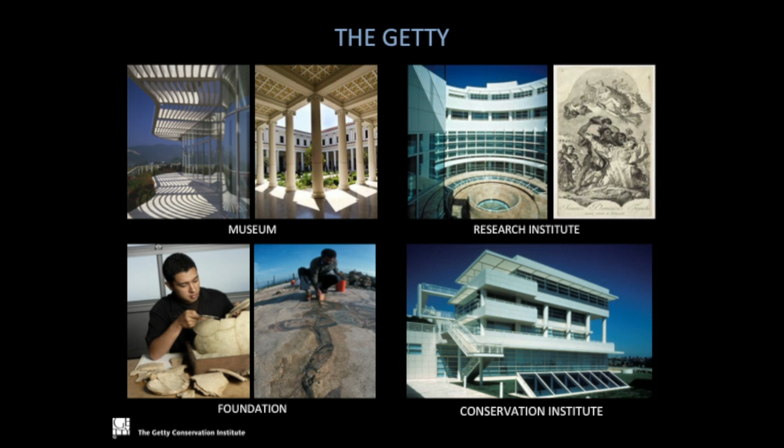So first I'm going to talk a little bit about the Getty. The Getty has four institutions. One is the museum, which has two locations, one in Los Angeles above Brentwood, and the other is the Getty Villa in Malibu. There is also the Getty Research Institute, an institution dedicated to the history of the visual arts in general, the Foundation, which gives financial support for special projects all around the world, and the Getty Conservation Institute, which is where I work.

The Getty Conservation Institute, or the GCI, has three departments: the education department, the science department, and the field projects department. Sometimes these three departments work together, and sometimes we do have projects that we run independently. So there is a lot of collaboration between all of them.

The field projects department, where I work, has a series of projects. We have a total of 22 projects that are around 25 countries around the world.

We just started our Conserving Modern Architecture Initiative. We have organized a colloquium to identify what the needs are in the field. We also started working on the Salk Institute, a masterpiece of Louis Kahn.

We have been working at the Eames House, a modern house located in LA, and we organized a colloquium to try to identify and design guidelines for architects to design within the historic environment, a topic of great importance.

We have a small section on recording and documentation, where we have developed inventories. The latest is Arches, an open source inventory system that allows many institutions to survey and document their sites.

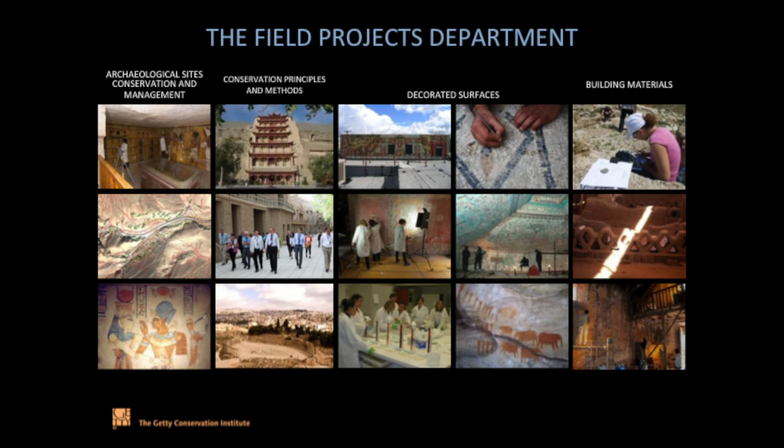And then within building materials there is the Earthen Architecture Initiative. That's the project I am going to talk about now, and within that I'm going to show two examples of projects.

So the first question is: why is earthen architecture so important? Basically, soil has been a primary material since man learned how to build houses and cities, almost 10,000 years ago. So it was the material of choice.

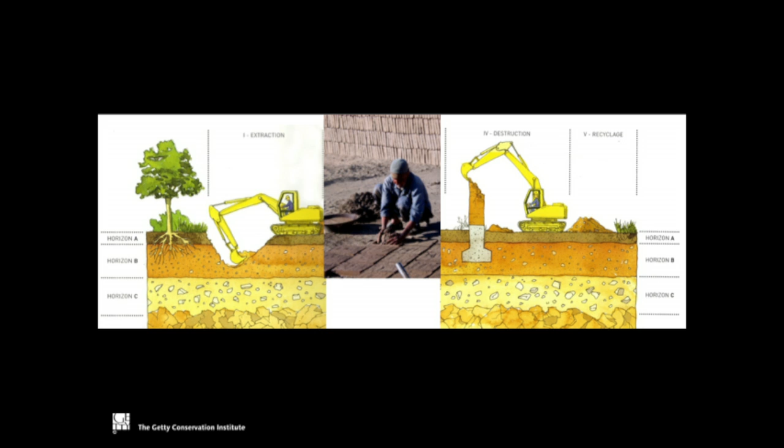This had to do with the fact that it's easily accessible, but at the same time there's a lot of attention to earthen architecture now because it's extremely sustainable. As you can see in this diagram, you take earth from the earth, you build, and at some point the earth goes back to the earth. It was used all over the world from the early ages.

This is Cliff Palace in the Mesa Verde National Park in Colorado in the United States. This site has earthen plasters that were done with a specific type of soil, from the 13th century.

Then we have, for example, another site, Huaca de la Luna in Peru, which has not only decorated surfaces made of earth, but also pyramids made of adobe, belonging to the Moche culture in Peru. This was built between the 1st and 8th century.

We also had the Citadel of Bam in Iran, which unfortunately got damaged by an earthquake in 2003. This is one of the largest citadels made of earth, and it was built in the 7th century.

We also have the archaeological complex of Chan Chan in the north of Peru. This was built by the Chimu culture after the Moche culture, in the 9th century.

It has an area of 20 square kilometers, with 9 palaces, the main one being the Tschudi Palace. We also have the Mosque of Jenne, built between the 14th and 15th century.

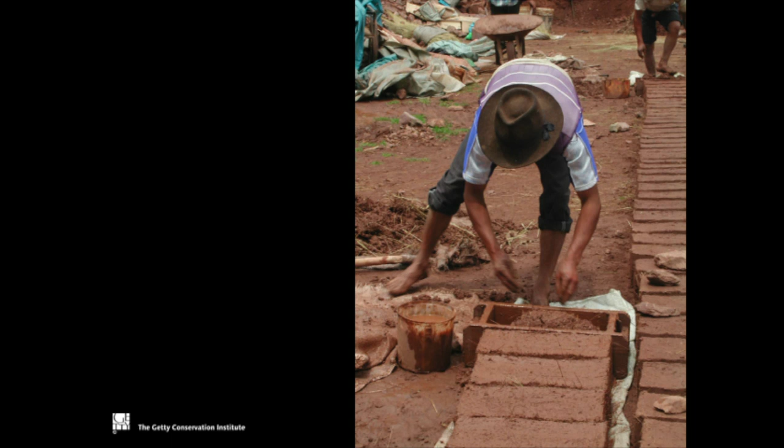Actually, 30% of the population live in earthen buildings. But that presents a series of challenges, particularly on historic sites, where there has been a lot of deterioration and lack of care. That's the reason why 57%, more than half, of the World Heritage sites in danger are made of earth, and 16 of 100 sites on the World Monument Fund watch list are made of earth. So there is definitely this problem of earthen materials and earthen architecture being deteriorated.

So the question is, why? As I said before, there is this lack of connection between the earthen building and the community, but there is also a lack of understanding of the science behind earthen architecture.

The first thing everybody needs to understand is that earthen architecture is made of basic soil. A soil consists of an ensemble of discrete particles of various shapes and sizes. I'm sure you as engineers know this. The types, the relative proportion of these particles, and most importantly, the forces between them give a soil a particular character and behavior.

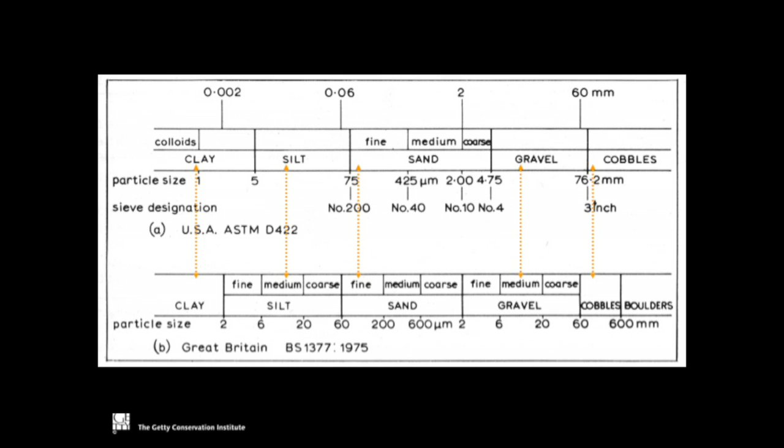This is a very basic chart that shows all the particles that are part of any kind of soil: clay, silt, sand, gravel, cobbles. The difference between the two charts is that one is the US ASTM standard and the other is from Great Britain, so sometimes there's some confusion depending on which part of the world you're in.

But the issue is how these particles interact with each other, and what are the main components that make a soil useful for one type of construction or another. These schemes are from CRAterre, an institution at the University of Grenoble in France that has studied earth as a building tradition for many, many years, and they came up with these graphics to make it easy to understand.

The first one is like a soil nodule — you see there is some clay, some sand, and in some cases some gravel. If you look inside, you can see different crystals. Looking further inside, it's a clay crystal with some ions around it. Going deeper, you see different crystalline units or sheets, with some space between those sheets. If you look at each of the sheets, there are two layers with ions between them — this is actually where water stays when you pour water into a clay material.

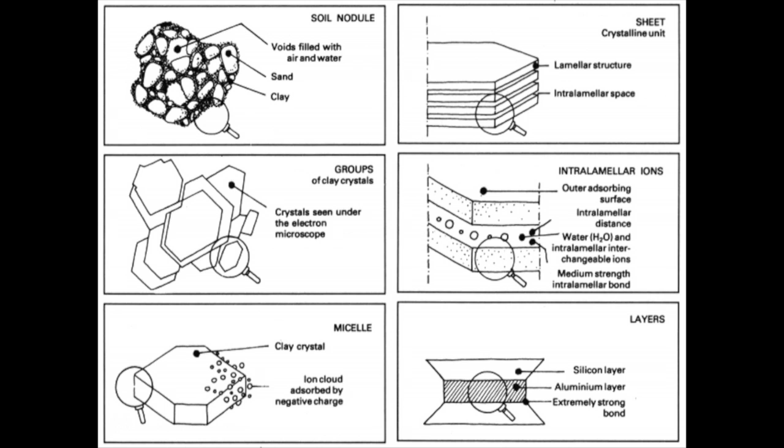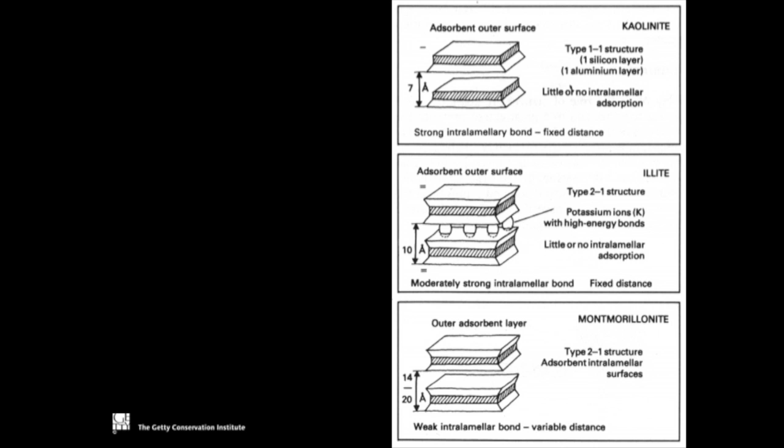These clay crystals can be of three types — I'm sure you've heard about this. We have kaolinite clay, which is very stable and mostly used for construction, because the distance between the two layers is constant. Then there's montmorillonite, which is the opposite — extremely unstable, because its distance between layers varies, meaning water can come in and expand the clay. And we have illite, which is stable in distance but has a lot of potassium ions. Those are the main three groups of clay minerals we can find, and that's a very important component of any kind of soil.

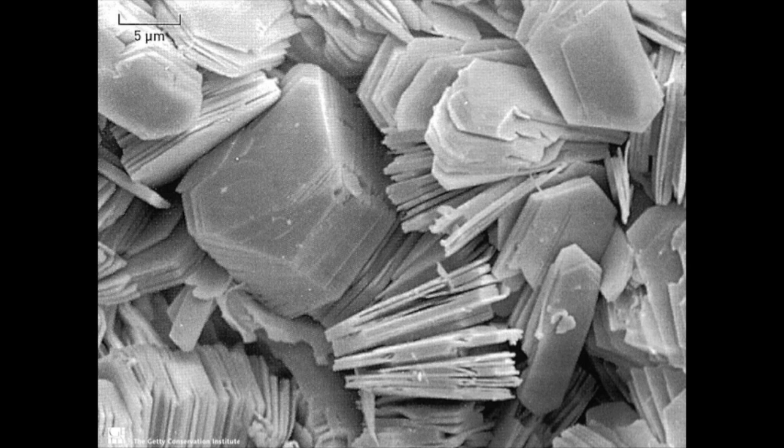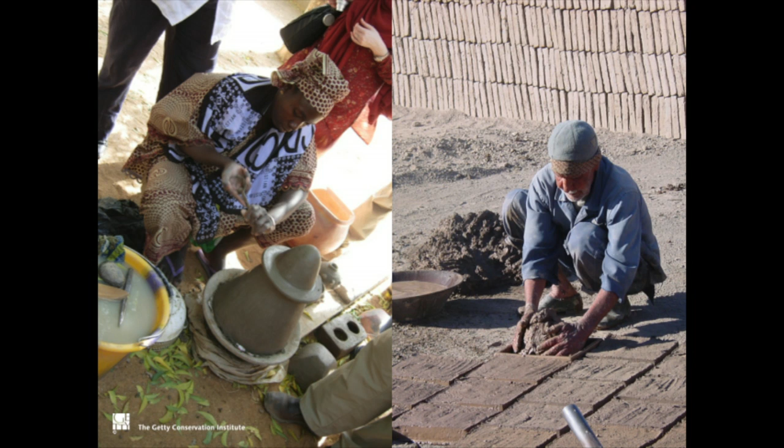This is the other very important component of a soil for construction: the amount of water you put on. You're probably aware of the forces that apply when two elements are joined by water, and that's exactly what happens in a soil for construction. You've probably seen the famous movie The Ghost, with the clay scene. Basically what you have there is a very stable clay that has had a lot of water put on it, so there's a lot of clay dispersion, allowing you to shape the vase of whatever you're doing. So it's much more plastic.

When you start using the same soil for construction, you have to manage the amount of water with the clay, but also the amount of sand and gravel. So water, despite the fact that for earthen buildings people think it's a really bad thing to build with, is actually one of the most important elements.

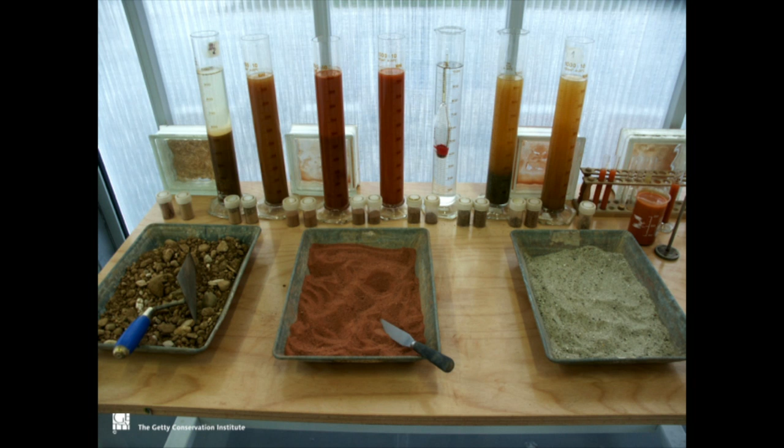Basically, the difference between one and the other is that you have all the crystals dispersed, and you have a different force here than here. This allows you to move it. This doesn't allow you to move it, because it's more strong. And there are a lot of tests that allow you to understand what type of soil you're dealing with in construction.

So we have a lot of tests for soil characterization: granulometry, sedimentation, X-ray diffraction, scanning electron microscope, which is what the images you saw before were from, ion chromatography, and then you have the Atterberg limit test.

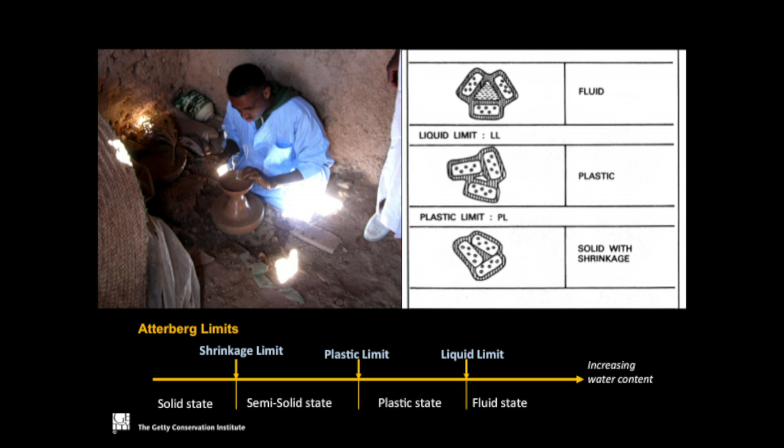That's a test very easy to do in a laboratory that basically allows you to understand when a soil goes from the solid state to the semi-solid state, the plastic, and then the fluid state. You also have water absorption by total immersion and capillary action, and all of these tests allow you to characterize a soil.

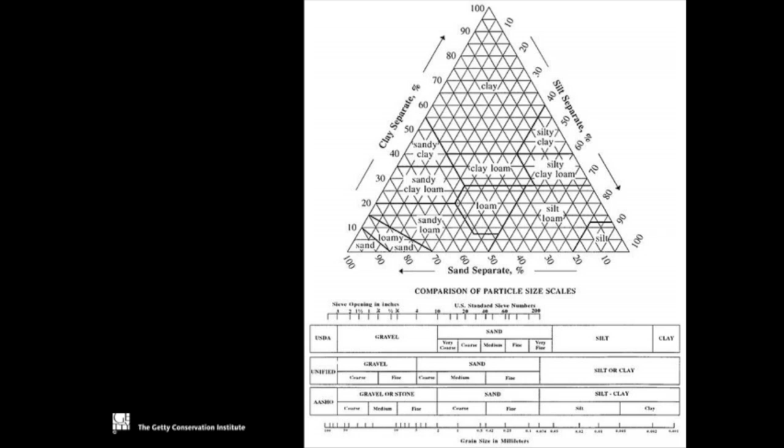This is a chart used by the USDA, the United States Department of Agriculture, that classifies all soils in this triangle, and it allows you to see how much sand you have, how much clay you have, etc. But that type of classification doesn't really help you understand which soils are good for which construction techniques.

So again, CRATerre, this institution in France, developed this chart where you have the proportion or amount of different particles on one side, and the state of hydration on the other. If you mix the two, you can start finding soils suitable for certain construction techniques.

For example, if you have a soil that is sandy, has a little bit of silt and a little bit of clay, and has gravel, and is in a sort of humid but somewhat dry state, you can use that soil

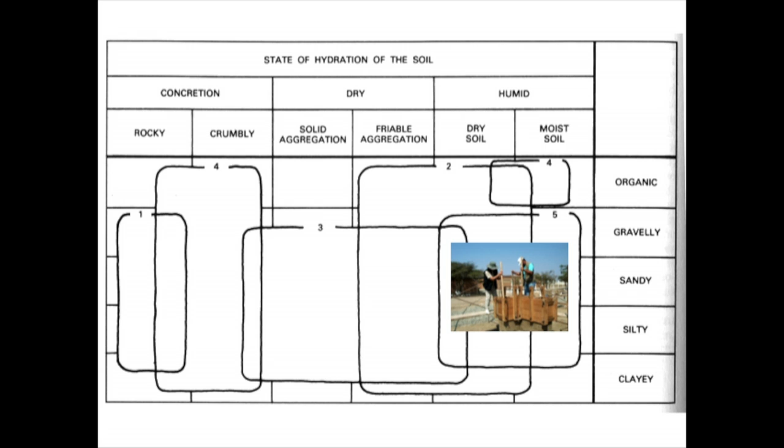for rammed earth construction. On the other hand, if you have a soil that has mostly silt and a lot of clay, with a little bit of gravel and sand, and is in a semi-soft state, that's a good soil for adobe. You also have a very similar configuration, but more clayey, for quincha, which is the technique

where you need to put the mud inside. All of these soil types have different characteristics. So not every soil is good for building construction. It's not that we can just go out, take the soil that's there, throw some water on it, and then use it. There's a special configuration of particles that allows you to build in one way or another.

There are at least, I think, 12 recognized construction techniques for earthen materials that use these different types of soils. The first one is the dugout, which is just carving within the earth, and this is an image of Cappadocia in Turkey.

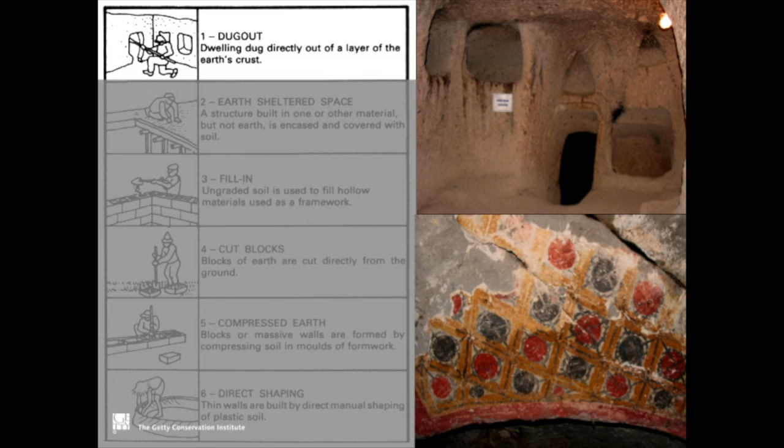I think it's in Central America. In English, I think it's called wattle and daub. There are constructions also in England made of this technique.

But the question is, if we have all this science behind how soils behave and how they're used for earthen construction, why does it fail? There are multiple reasons why it fails, but the Getty is concentrating on two, which had to do with the projects we are developing.

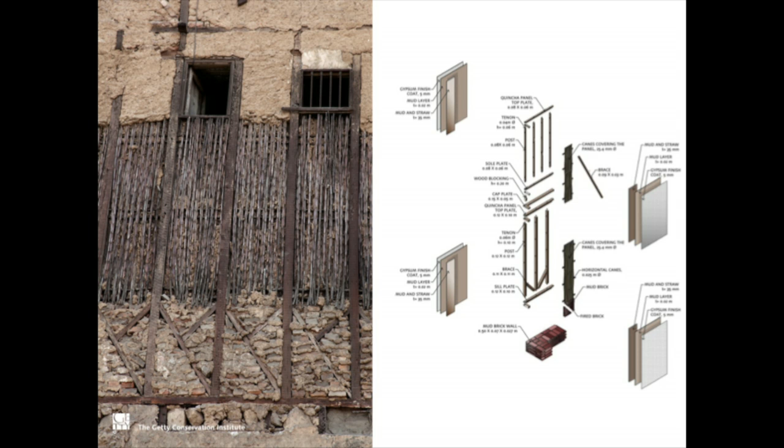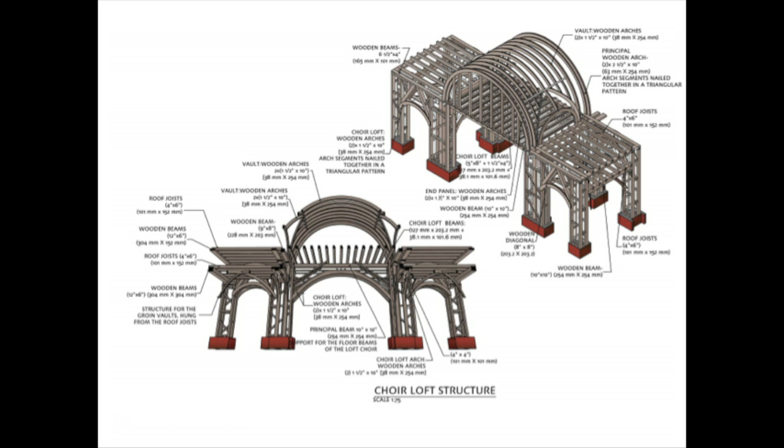So these churches are made of earth. But since then, we have suffered a lot of earthquakes, and in some cases that turned us into building with concrete or brick or reinforced masonry, and the tradition of building on earth was moved to the rural areas, because it's still being used in Peru.

But that was for new construction, not for historic buildings. So when we were deciding where we were going to work, there was an earthquake in Peru in 2007, in the south part of Lima, and there were a lot of sites that were damaged, not only made of earth, but also, you can see here, this is concrete, probably badly constructed, and that's probably the reason why it fell.

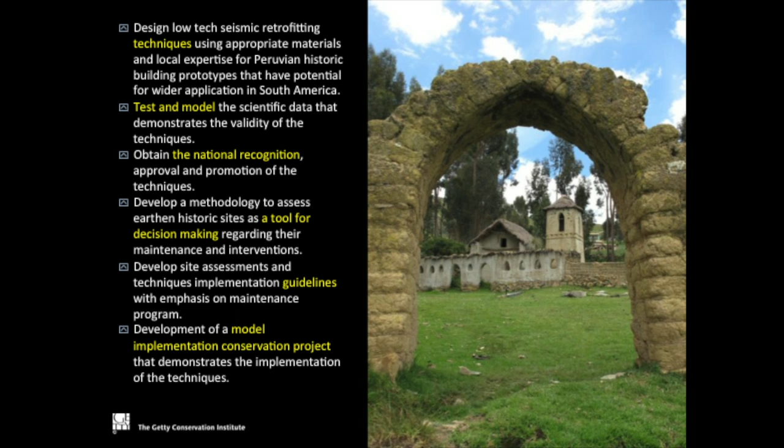And that has a whole methodology that was also developed with our partners. At the beginning, we partnered with a School of Engineering in Peru, the Pontificia Universidad Católica del Perú, that has more than 20 years working on earth, mostly for new construction. Then we partnered with University College London because they had expertise in developing computer or finite element analysis or modeling. And then we also partnered with Carleton University for a specific component in one of the buildings.

We always partner with the state agency, in Peru's case, the Ministry of Culture. But then we also created this peer review group that is basically a series of engineers from different parts of the world and also engineers in Peru who meet with us at specific points of the project to let us know if we are doing something wrong.

So we basically presented the project to them and they gave us their feedback. That was also a way of disseminating the project.

The project has a methodology: first we did research, then analysis, testing, and design. Then comes the phase of dissemination, and at the end we develop implementation projects as model conservation projects.

So we started by trying to identify building prototypes in Peru that were similar to other buildings in Latin America. We visited a series of sites, ranked them by a series of conditions, and at the end we selected 4 buildings.

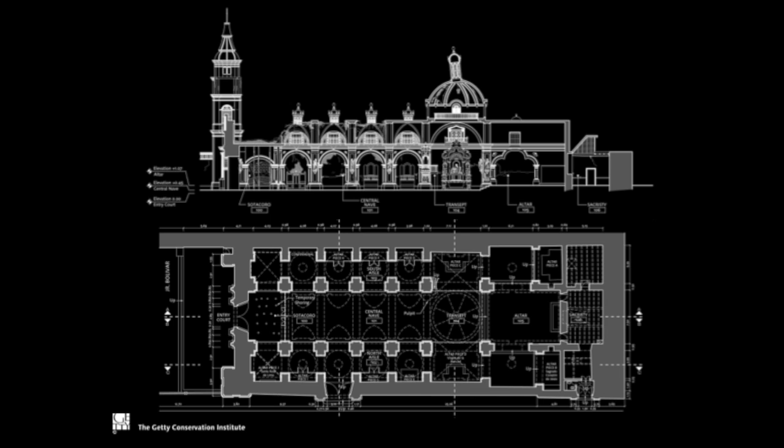The first one is the Cathedral of Ica. We did the architectural survey, not with Mario but with local professionals, and did a site assessment after the earthquake. We also used some non-destructive techniques.

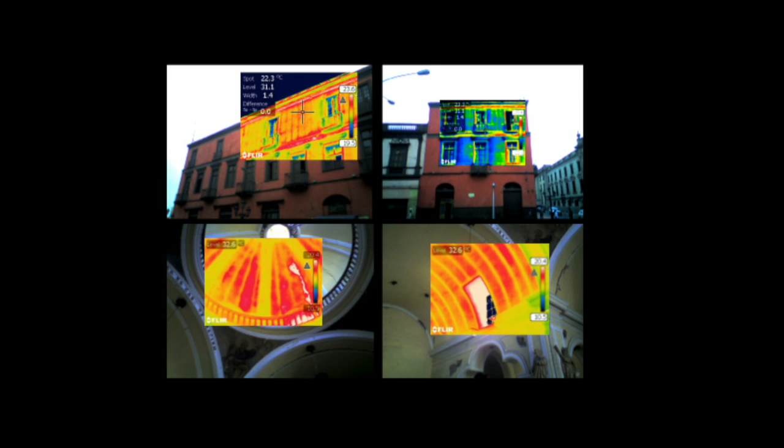So what we did is use the thermocamera to identify them. Here you can see the wooden posts behind the plaster. We used the same method to identify the wooden arches at the Ica Cathedral, which you can see there.

After doing non-destructive survey as much as we could, the engineers really needed to know exactly how the connections between the different structural elements were - something architects don't like to do because it's like you're damaging the building, but the engineers insist.

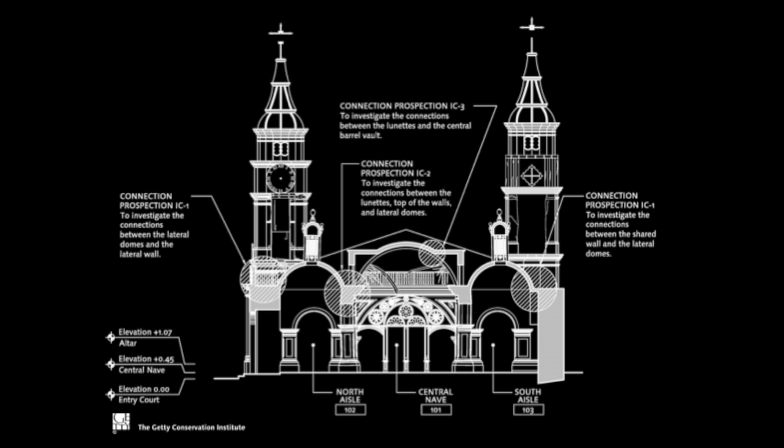So I had to go through all the permits with the Ministry of Culture to be able to open up the building in a very methodical way. We looked at columns inside, at corners, and went to places you could not possibly imagine. At the end, we had the general configuration of the site, all documented and measured.

This is the other site where we've been working with Carleton: Cuñotambo, a small village of around 500 houses, 2 hours south of Cusco. The beauty of the city is that it's all made of earth - very authentic, no building in concrete. That's really good for us.

And it has this beautiful church - one of the most important things is that this church has never been modified, so however the Spaniards built it, that's how it is. We chose this particular church because it has not been modified, and it was very typical of the churches in the Andes.

One of the challenges is that it has these beautiful wall paintings. Most engineers will agree that when you have to retrofit a building, it's very difficult to do without touching the walls. That was a challenge we wanted to address: what do you do when you have wall paintings and you cannot remove them?

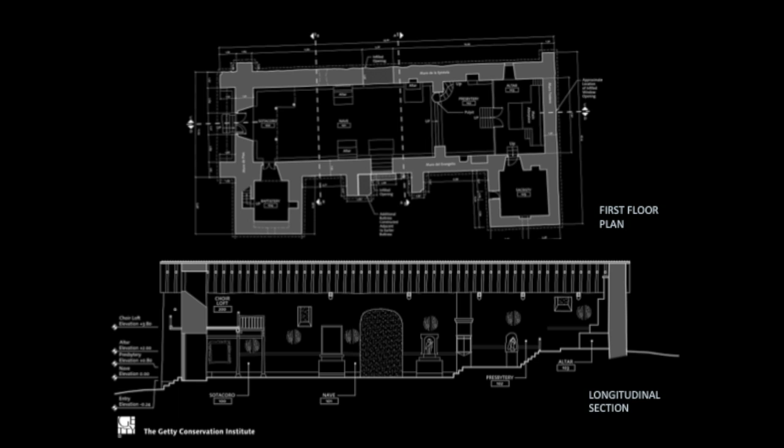So we did the same architectural survey, again not with Mario but with local professionals. We did the openings and came up with the general structure of the building. These 4 buildings were later recorded in publications - I brought some here, and I also gave some to Mario to distribute accordingly.

So we have what we call a construction assessment that basically describes how these 4 buildings were put together. And then we had our first meeting with our peer review committee.

They were all wearing Peruvian shirts because at that time the Peruvians were playing, I don't know, the Latin American Cup or something, and they were almost winning, which never happens in Peru. So everybody was really excited about it. So I bought them T-shirts, and they wore them with the Getty banner.

And then we visited the sites, but we also had a series of meetings where they evaluated the methodology we applied for the construction assessment, but also for the testing and the modeling. So once the peer reviewers approved the procedures for the modeling and testing, we started the testing and the modeling.

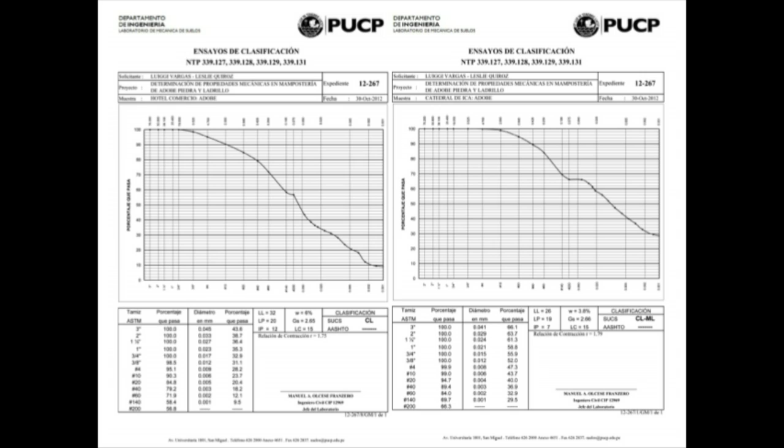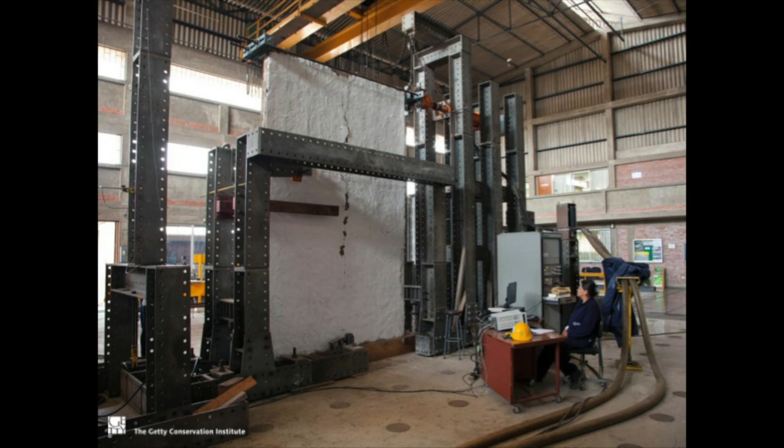We did granulometry for all 4 sites. We also did a lot of wood identification and wood testing for 2 of the 4 sites that have wood. We also developed this displacement testing at Católica University.

We reproduced the quincha panels of El Comercio, but we also got lucky enough to get — it's not luck, but one of the houses in the historic center had collapsed and they were going to demolish it, and they had these historic quincha panels. So we said, no, don't break them, don't break them.

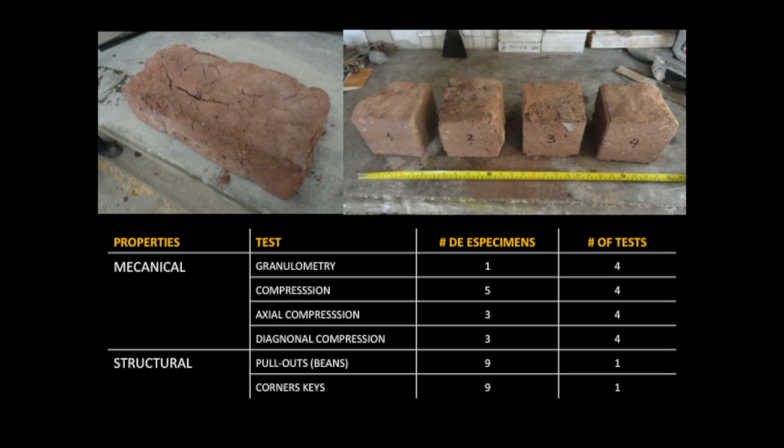So we took the quincha panels to Católica and tested them. We also tested historical materials, and did the typical mechanical tests for mechanical and structural properties for all 4 sites. There were around 300 tests run over a period of 1.5 years at Católica University.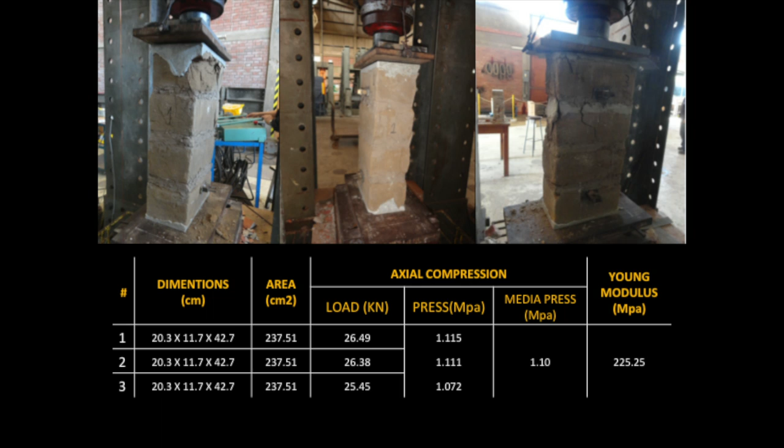We did compression tests, actual compression tests on piles. For these we reproduced adobes, but we also used historic adobes. We were able to get some adobes from houses in Lima and from the Ica Cathedral, so we were able to test historic material with diagonal compression.

And then Católica University developed this test called the pull-out test that allows you to understand how much a wooden beam can resist in an adobe wall. This is something that has never been done in Peru.

And that has to do with the fact that Peruvians, and a lot of people who work in conservation of earthen sites, always think these sites are just amazing because they've withstood so many earthquakes. But when the engineers ask us for calculations or numbers, we don't have any. The only thing we have is proof that the building is still standing after 300 years.

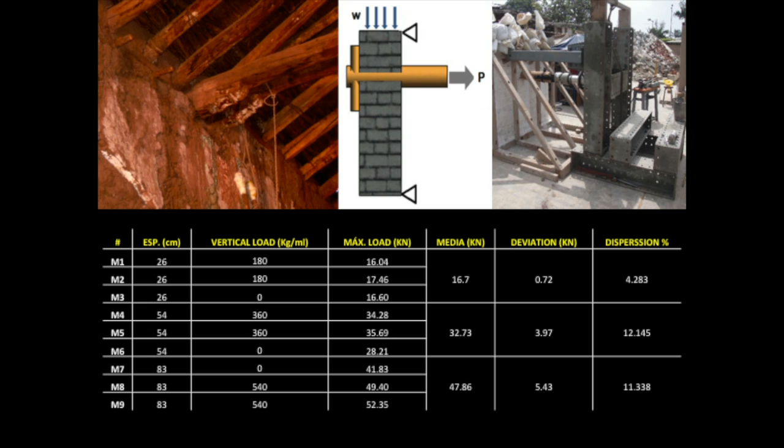But nobody has taken the time to actually reproduce and run the tests to get some numbers so the engineers are satisfied. So we've been able to do that. And these are more results of the pull-out test.

And at the same time, with the data from the construction assessment report, UCL built this model — probably you're familiar with this tool. We used Algor, a software that's normally developed for concrete and steel buildings, but we were able to modify certain parameters and characteristics to input some details of the materials.

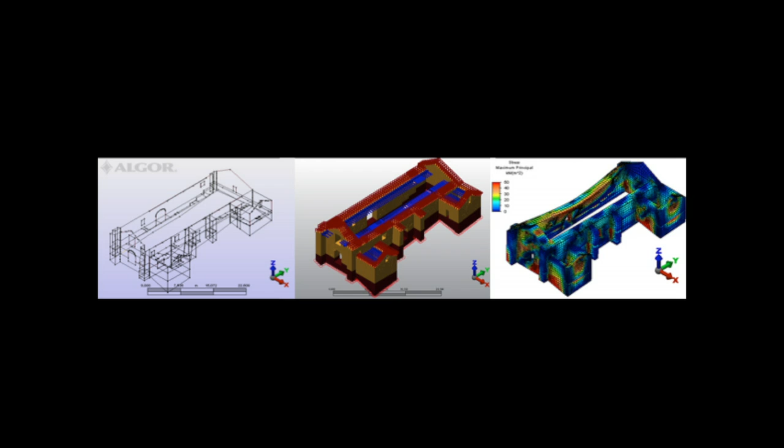So all the data collected from the tests was then transferred to the models. And you've seen these engineers — basically, with the reproduction of the models, you can see how a building behaves during an earthquake, and you can also understand what areas need retrofitting. So this is sort of a tool of analysis.

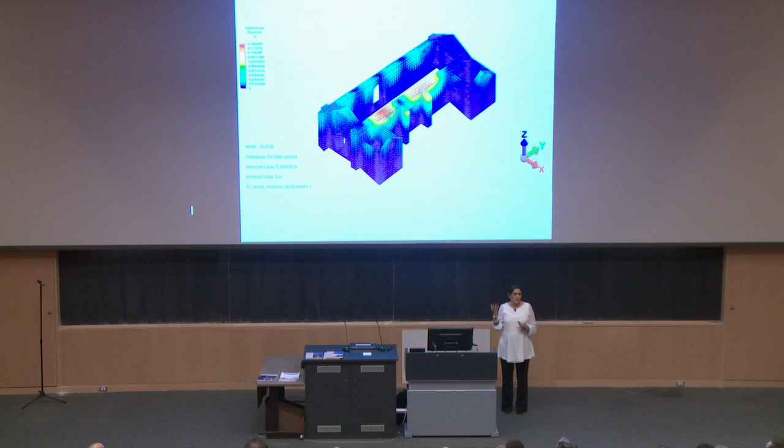And the reason, or the way we did this, is so that anybody in Peru can reproduce it if they want to do some intervention on their buildings. Then we did the same for Ica Cathedral. This isn't the latest version, but you can see how the wooden structure moves in certain directions.

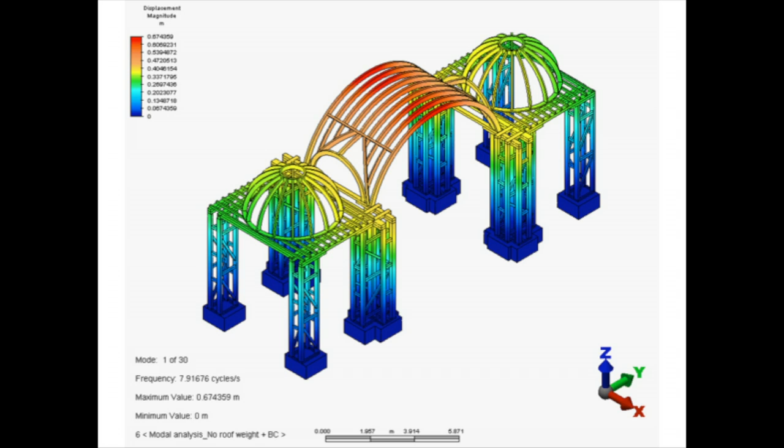This was really difficult to construct because we actually had to reproduce and run a bunch of tests regarding the connections of the wood. So we had to reproduce them, design the test, come up with the results, and send them to UCL.

And after that, we started to come up with some retrofitting solutions, in this case for the Church of Cuñotambo — very low tech, because Cuñotambo is about 4,000 meters above sea level. It's really high, and there's no way any engineer is going to stay there for the duration of the work. So we had to find materials that are locally available, so they can actually retrofit their church.

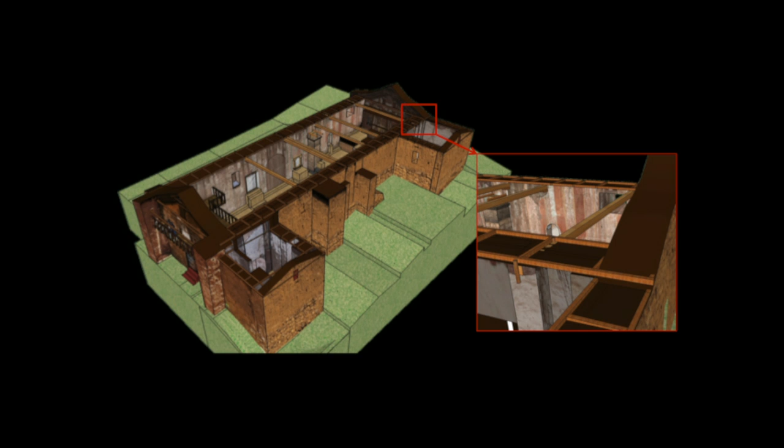At the end, we will run the model, and this is a partial one. It's very small, so I can do it. But we will run the model with these techniques already implemented, so they will have a scientific proof that the techniques work.

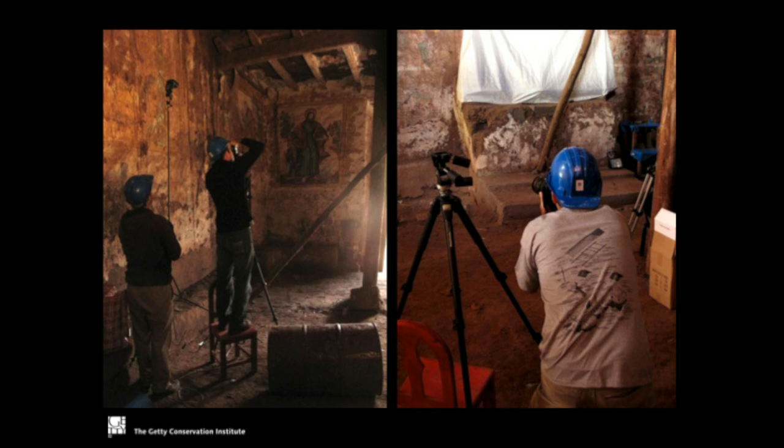In the process of doing this, we became really engaged with our Peruvian colleagues from the Ministry of Culture, and at that time we also started partnering with Carleton University. The reason we did that is because this site has these precious wall paintings, and we really wanted to be able to record them before any kind of intervention started. So we talked to Mario, who talked to Carleton University, and they were able to put together a program for them to develop the rectified photography of all the wall paintings.

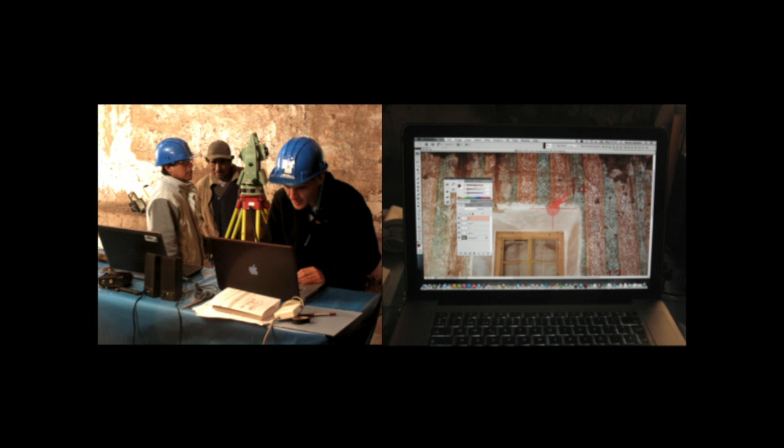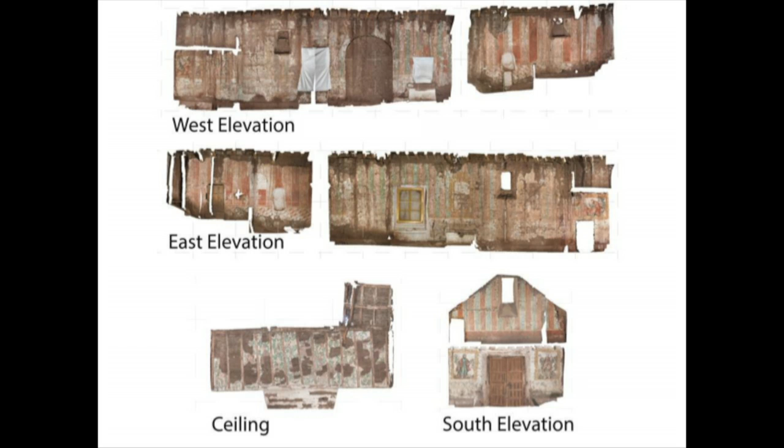I'm sure this is a familiar image for some of the engineers. One of the things that was also really good is that Mario had the capacity, because he speaks Spanish, to actually engage even more our Peruvian partners, so they were actually working with us during the process. It was a capacity building component as well in that project. This is the result of that rectified photography of the wall paintings.

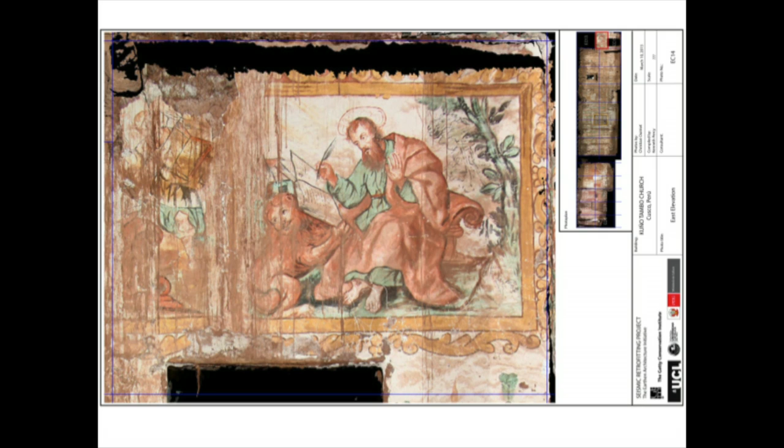After that, we did an assessment, in which students from Carleton also participated, of the wall paintings. We identified a series of conditions. This glossary was actually also made by Carleton students. Then we carry on the assessment using a system that is quite standard: you have the rectified photography, you put it in a sheet, you record the conditions, and with that you can make a proper diagnosis.

The reason why we were so interested in doing this and engaging our Peruvian partners is because in Peru, unfortunately, there is still this tradition, particularly in Cusco, that when you have wall paintings, what they do is basically a strappo. That means they cut the wall paintings, take them out, repair the wall, and then put it back. That's an old technique for the conservation of wall paintings. The problem is that afterward you can see the scars of the cuts, and that doesn't go away. So we are trying to work with our Peruvian colleagues to come up with a system where you don't have to do that in order to structurally repair the wall.

The next steps for this project: we are in the process of developing the construction documents for the seismic rehabilitation, so it's a project. Regarding the testing, we're going to produce another publication like this one, which hopefully will be done soon. It's a little bit challenging to write with the engineers, but we're getting there.

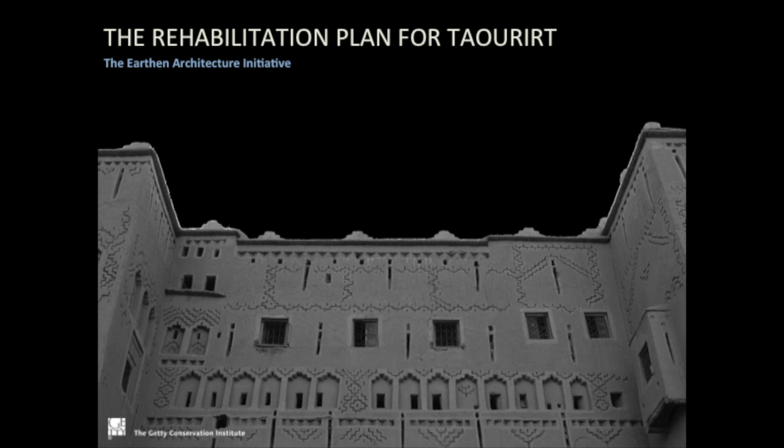So the second component I want to talk to you about is the Morocco project, which I think you have seen some images of already. This project started in 2010. The Getty decided to also investigate this region, where we had been working in areas of seismic design and building codes, etc. But we were aware that there was a huge amount of earthen sites, particularly south of Marrakesh, so we made a reconnaissance trip.

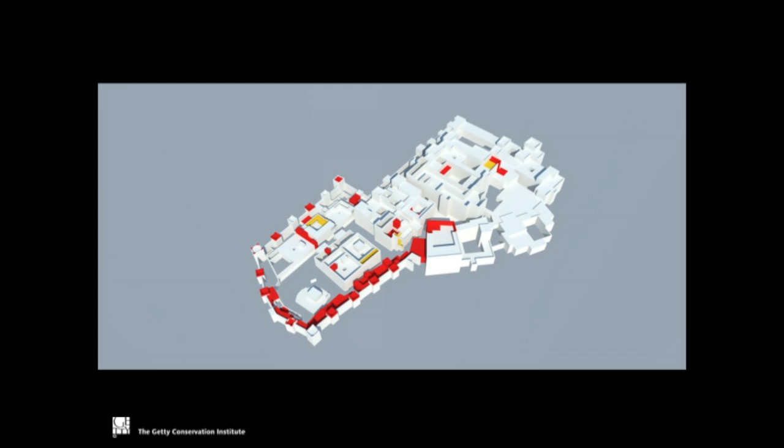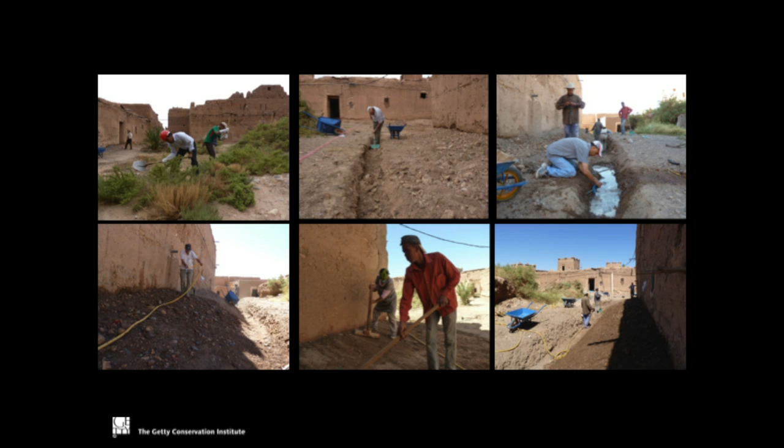But we got it. The other thing we did is develop emergency interventions at the site. For that we worked with an institution, CRAterre, in France, and we were able to work with CERKAS personnel to do stabilization of the walls. We were also concerned about the rainy season and how to deviate the rain for proper drainage, so we worked with our colleagues from Morocco at the Center for the Conservation of the Kasbah, which actually has its offices within the site.

It's quite impressive because there are only 4 people, and they are in charge of 250,000 Kasbahs in the region, plus other architectural heritage. I don't know how they do it, but it's a lot of work. We work with them whenever we go there. These are other images of the emergency interventions.

One of the main problems we encountered is that they don't have a systematic way of documenting their sites. Sometimes it's hand-drawn plans, other times photos. They learned how to use a total station—actually, I think it was a theodolite many years ago.

We wanted to give them a proper way to document, organize, and make an inventory of their sites. So that's when we called Mario again, and he went with his student to do the survey of the Taourirt area, the area I showed you. It was a really productive time—I think we worked over 3 weeks together.

At the same time, Mario was in charge of training our CERKAS colleagues. Now they are able to do their own survey. They have a total station they can use, and they continue receiving training every time Carleton goes to the site.

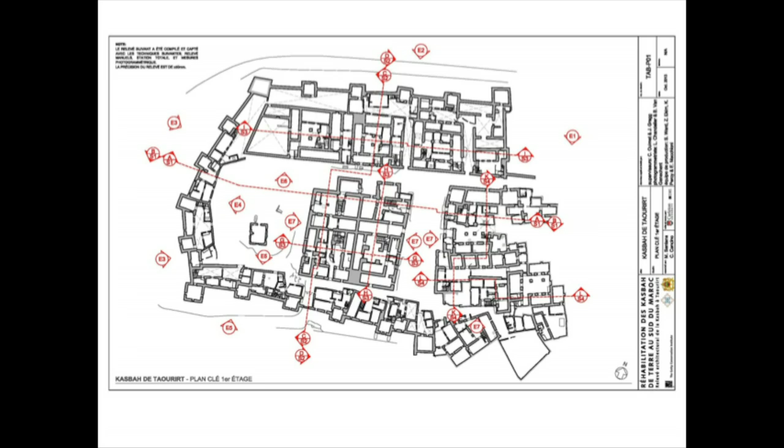We also had typical teaching sessions in the classroom where CERKAS personnel worked on rectified photography. They were able to do the survey with them and work on the process on site. They developed a series of comprehensive drawings and also rectified photography—I didn't include all the 3D modelings they developed to create accurate plans, because the photos really didn't show how it is. Some spaces are literally like this.

You don't understand what the previous owners were doing in spaces like that. But the Carleton students were champions—I don't know how they did it, but they carried the total station there and made the survey. When they couldn't use the total station, they did rectified photography, and with the software they were able to create plans and elevations.

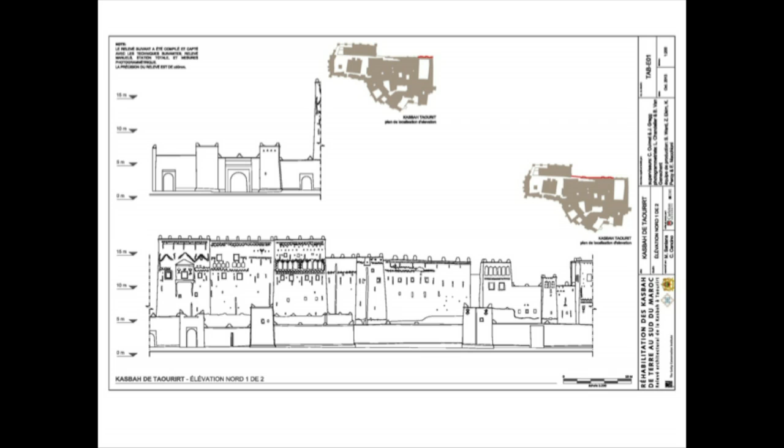This was also done with some consultants from Carleton, like Chris, whom we met, who works in Morocco with us as well. These allow us to have detailed elevations and cross sections, which is really good because they are geo-referenced, etc.

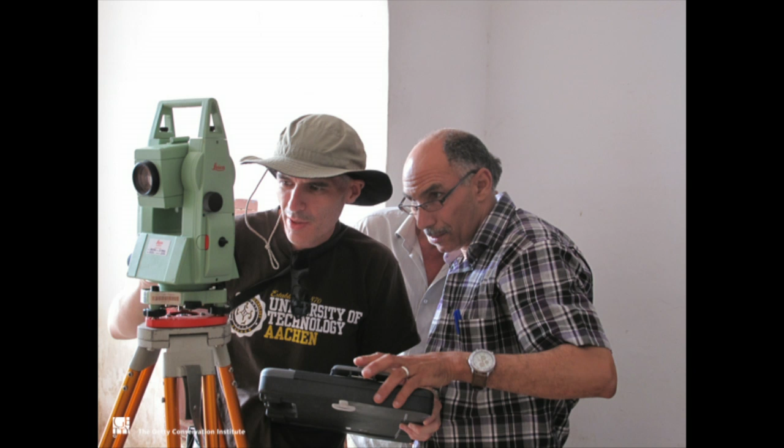I think you've seen this picture already in the series of images Mario showed you, because after the success of the first survey we wanted to continue developing the survey and training the CERKAS personnel, so we called Carleton again, this time to do the survey of the Caid residence. The training continued with the CERKAS personnel and also rectified photography in these really complicated rooms that Carleton students were able to get into.

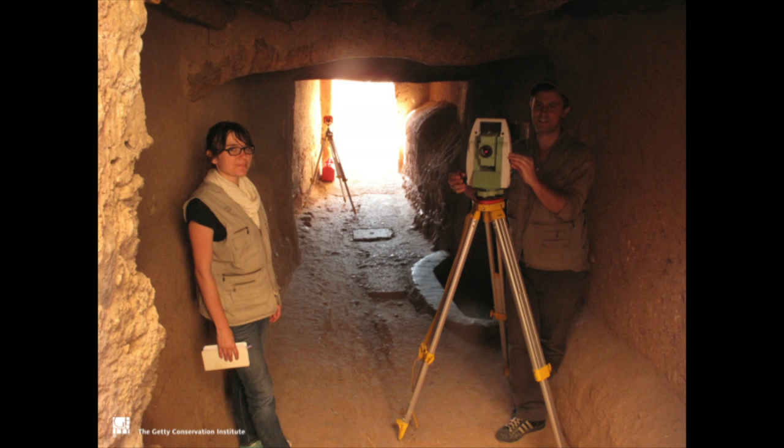At that time also, Carleton carried on the survey of the open spaces of the Qasr. That was a challenge because people were coming in with the total station, and the kids were inside of it. It was within the city, so the community knew what we were doing.

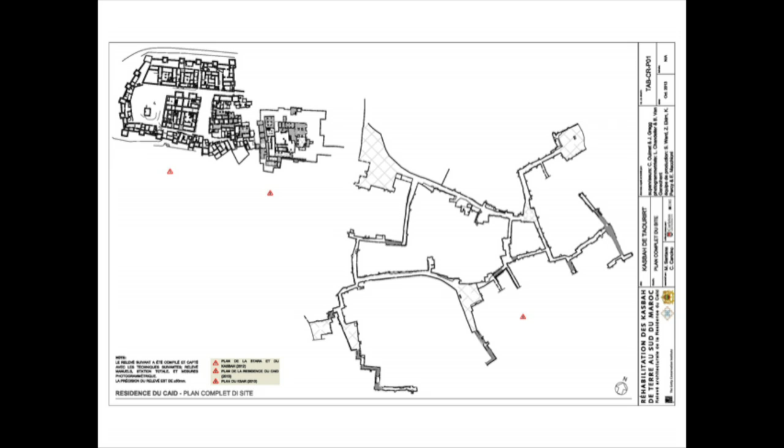They developed another set of drawings, this time with the Caid residence. At that time we also had the opportunity to engage the community in what we were doing. I think this was the first public presentation of the work, and the community was there.

Then we called Carleton again for another campaign, this time to check on the training of CERKAS personnel, but also to try to develop a more comprehensive project on their inventory and how they are going to organize their sites. So we continued working with that, and now we are going to add the museum and the Caid residence to have the complete set of drawings.

In this last campaign we also worked a lot on the statement of significance of the site, to identify which areas were the most important, and which ones could actually be removed. This is quite critical because, as I'll show in some images, it's a living tradition in Morocco.

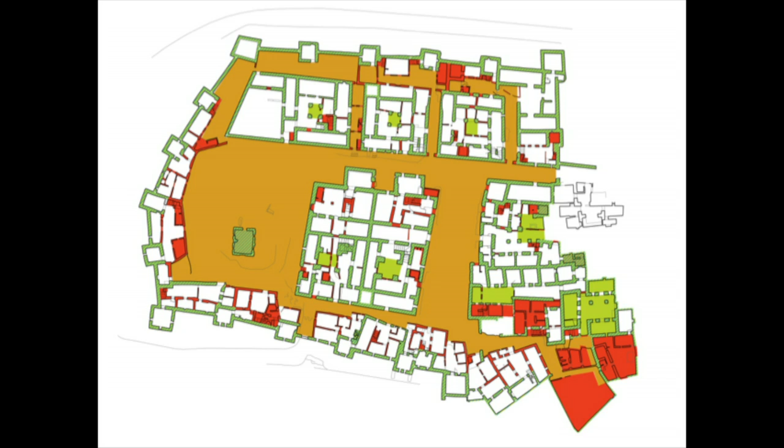They really don't approach the building the way we would, thinking that you are not supposed to modify it. They say, there is the roof, it has some problems. I say, but that's not a problem. We will redo it and repaint it. It's very difficult to work in a situation like that because it's a living tradition, but at the same time you try to respect the historic fabric. So it's always a challenge.

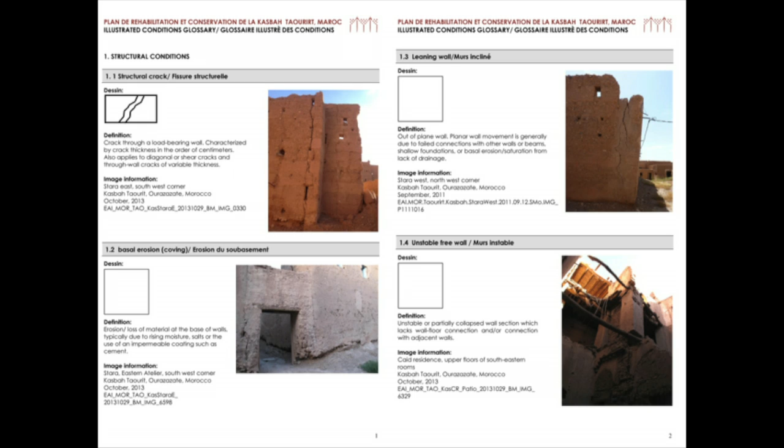But together we were able to identify the areas that are more important, write a statement of significance, and what we are doing next is also a condition assessment of the site, more like a structural condition assessment. The idea is to come up with a program for proper use of this enormous site, which has great significance in the region. So it's quite challenging, but at the same time very rewarding.

We are doing this also with the intention for them to properly allocate more sensible uses to the site than this empty museum, or sometimes they rent this patio for rock concerts. So it's a little out of place - it needs to be an integrated plan for reuse.